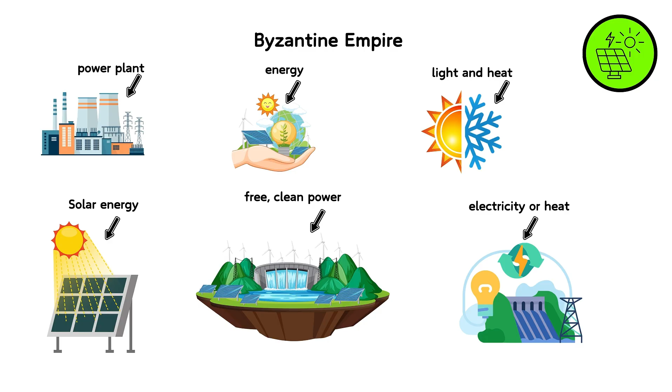The beauty of solar energy lies in its simplicity and abundance. As long as the sun shines, we have access to this incredible power source.

Solar panels, which you might see on rooftops or in large fields, are like sunlight catchers. They're made of special materials that get excited when sunlight hits them, creating an electric current. This process, called the photovoltaic effect, is like magic. It turns light directly into electricity without any moving parts or noise.

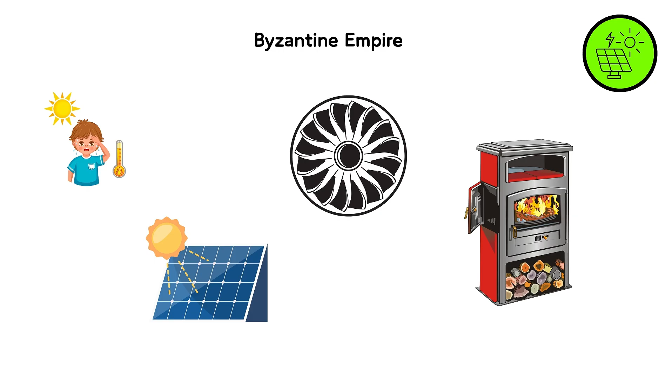But solar energy isn't just about electricity. We can also use the sun's heat directly. Solar thermal systems can warm up water for homes or even power large steam turbines in solar power plants. In some countries, people use simple solar cookers to prepare meals, harnessing the sun's heat directly.

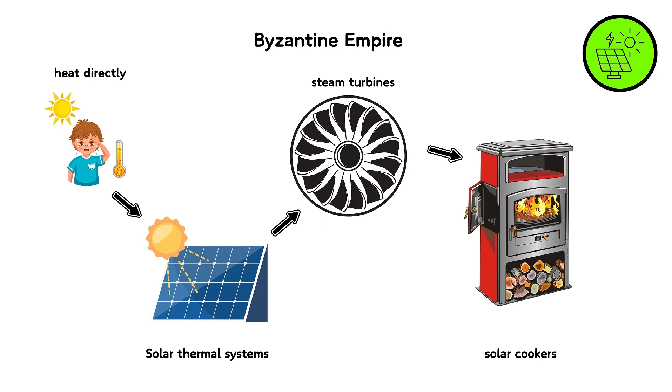The potential of solar energy is mind-boggling. In just 1 hour, the sun provides enough energy to power the entire world for a year. As we get better at capturing and storing this energy, solar power could revolutionize how we power our lives, leading to cleaner air, reduced climate change, and energy independence for many regions.

Wind energy. Wind energy is like harnessing the breath of the planet. It's a dance between the sun's warmth and the Earth's rotation, creating invisible rivers of air that flow across our world. Humans have been tapping into this power for thousands of years, from sailing ships to windmills grinding grain.

Today, we've scaled up this ancient technology to produce significant amounts of electricity. Modern wind turbines are like gigantic pinwheels, some as tall as skyscrapers. As the wind blows, it pushes against the blades, causing them to spin. This spinning motion is converted into electricity through a generator inside the turbine. It's a beautiful example of turning motion into power, much like a bicycle dynamo but on a massive scale.

One of the most exciting aspects of wind energy is its potential for offshore development. Out at sea, winds are stronger and more consistent. Massive wind farms can be built without taking up valuable land, turning our vast oceans into clean power plants.

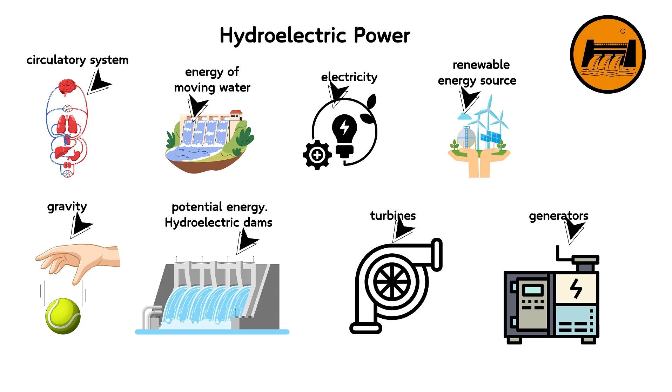The principle behind hydropower is beautifully simple. As water flows downhill, pulled by gravity, it carries enormous potential energy. Hydroelectric dams capture this energy by forcing water through turbines, spinning them like giant underwater windmills. These turbines are connected to generators that convert the mechanical energy into electricity.

What makes hydropower special is its reliability and flexibility. Unlike wind or solar, hydroelectric plants can produce power consistently, day and night, as long as there's water in the reservoir. They can also quickly adjust their output to meet changing energy demands, acting like a natural battery for the electric grid. But hydropower isn't just about massive dams.

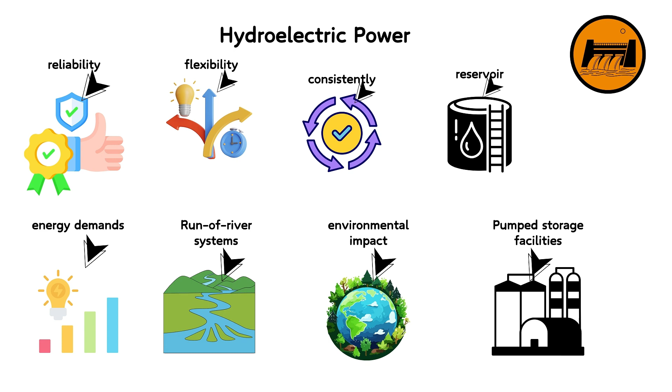Run-of-river systems harness the natural flow of rivers without large reservoirs, minimizing environmental impact. Pumped storage facilities act like giant batteries, pumping water uphill when electricity is cheap and releasing it to generate power when demand is high. While hydropower has significant benefits, it also comes with challenges.

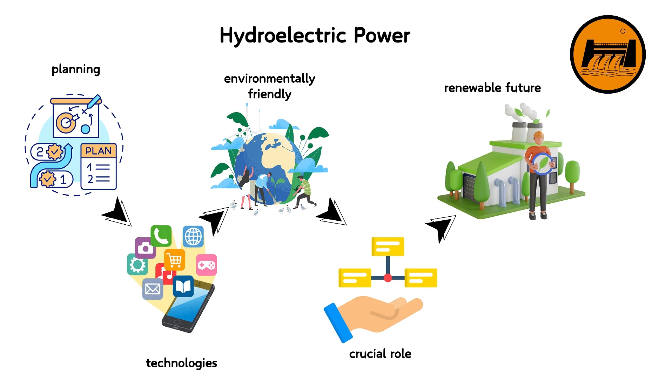Large dams can disrupt ecosystems and displace communities. However, with careful planning and new technologies, we're finding ways to make hydropower more environmentally friendly, ensuring this powerful energy source continues to play a crucial role in our renewable future.

Biomass energy. Biomass energy is like recycling the sun's energy stored in living things. It's a versatile renewable source that turns organic matter, from trees and crops to animal waste, into usable heat and electricity. In a way, it's solar energy with a biological twist, captured through photosynthesis and released when we need it.

The concept of biomass energy is as old as the first campfire, but today's applications are far more sophisticated. We can burn wood chips or agricultural residues directly in power plants, much like coal, but with a crucial difference: the carbon released was only recently absorbed from the atmosphere, making it potentially carbon neutral over time.

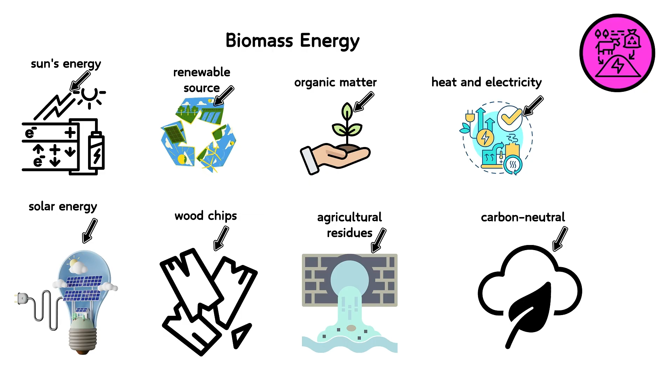But burning isn't the only way to harness biomass. Through various processes, we can transform organic matter into biofuels like ethanol or biodiesel, providing renewable alternatives to fossil fuels for transportation. Another exciting application is biogas production, where microorganisms break down organic waste in oxygen-free environments, producing a methane-rich gas that can be used for cooking, heating, or generating electricity.

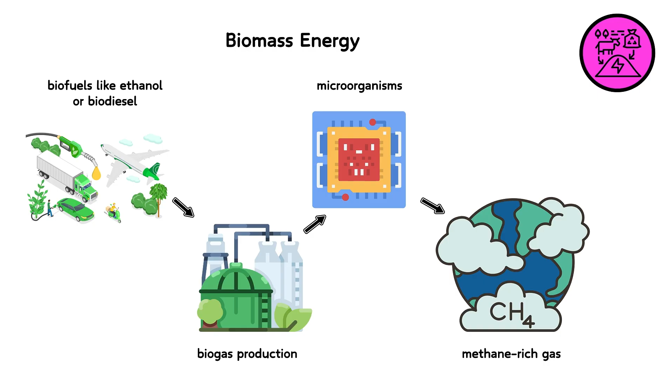One of the most compelling aspects of biomass energy is its potential to solve multiple problems at once. It can provide a use for agricultural waste, help manage landfills, and offer a renewable energy source, all while supporting rural economies. However, biomass isn't without controversy. There are concerns about competition with food crops and the sustainability of large-scale biomass production. The key lies in responsible management and using waste materials rather than dedicated energy crops.

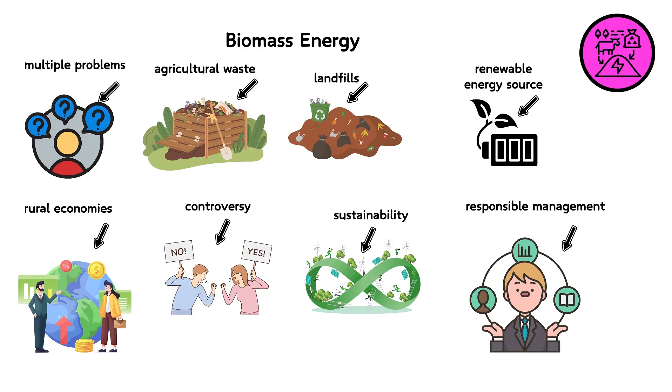Geothermal energy. Geothermal energy is like tapping into the Earth's own furnace. Deep beneath our feet, the planet's core is a swirling mass of molten rock and metal, generating immense heat. This energy source is a testament to the raw power contained within our planet, quietly warming the ground beneath us and occasionally bursting forth in spectacular volcanic displays.

Harnessing geothermal energy involves drilling deep into the earth to access hot water and steam trapped in underground reservoirs. This heat can be used directly for warming buildings or greenhouses, or it can be converted into electricity in geothermal power plants. In these plants, steam drives turbines connected to generators, much like in conventional power stations, but without the need for burning fossil fuels.

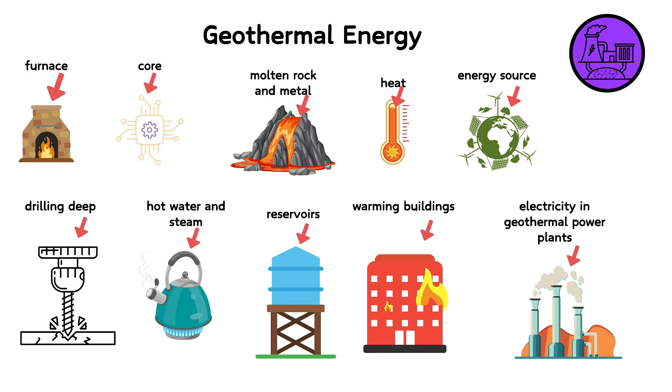What makes geothermal energy particularly attractive is its consistency. Unlike wind or solar, geothermal power is available 24/7, regardless of weather conditions. It's also incredibly space efficient. A geothermal plant can produce as much power as a coal plant in a fraction of the land area.

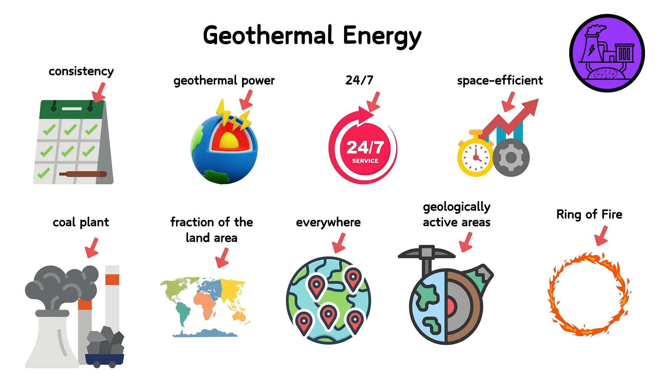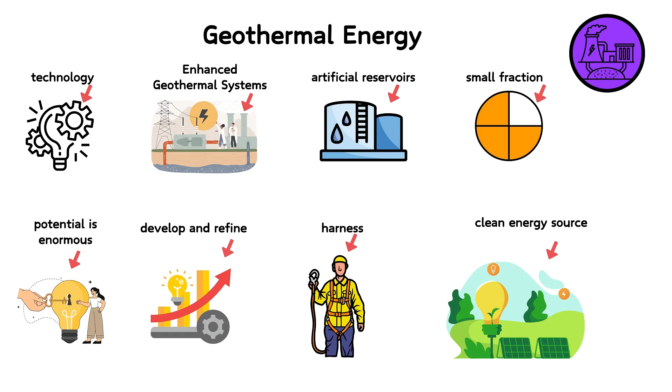However, geothermal energy isn't available everywhere. It's most accessible in geologically active areas, like the Ring of Fire around the Pacific Ocean. But advances in technology, such as enhanced geothermal systems (EGS), are expanding the potential reach of this energy source. EGS involves creating artificial reservoirs by fracturing hot dry rocks and pumping water through them, essentially manufacturing geothermal resources where they don't naturally occur. While geothermal energy currently provides only a small fraction of global electricity, its potential is enormous. As we continue to develop and refine geothermal technologies, we're learning to better harness this vast, clean energy source sleeping beneath our feet.

Ocean energy. Ocean energy is like harnessing the heartbeat of our planet. The vast, restless seas that cover more than 70% of Earth's surface hold an immense amount of energy in their waves, tides, and temperature differences. This renewable source represents one of the last great frontiers in clean energy production.

Tidal energy taps into the regular rise and fall of ocean levels caused by the gravitational pull of the moon and sun. Imagine giant underwater turbines spinning as water rushes in and out of bays and estuaries. These predictable tides offer a reliable source of power, unlike the intermittent nature of wind or solar. Tidal barrages work like dams across estuaries, while tidal stream generators operate more like submerged wind turbines.

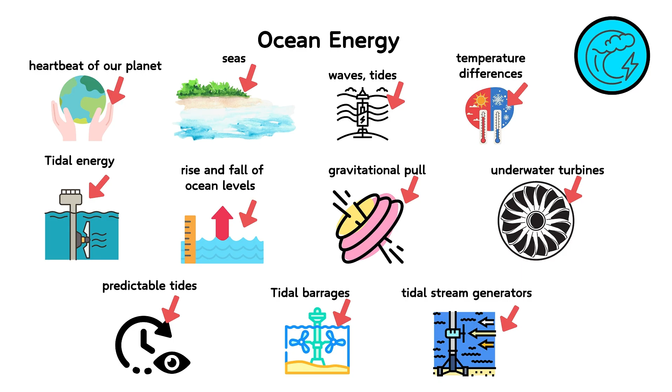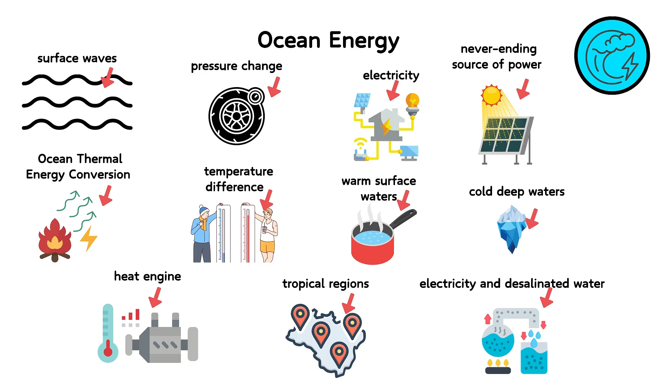Wave energy, on the other hand, captures the power of surface waves. Various ingenious devices bob up and down with the waves or use the pressure changes as waves pass over them to generate electricity. It's like converting the ocean's constant motion into a never-ending source of power. Another fascinating form of ocean energy is ocean thermal energy conversion, OTEC. This technology exploits the temperature difference between warm surface waters and cold deep waters to drive a heat engine. It's particularly promising for tropical regions and could provide both electricity and desalinated water.

While ocean energy technologies are still in their infancy compared to other renewables, they hold enormous potential. The energy contained in the world's oceans could theoretically meet all of humanity's power needs many times over. As we continue to innovate and overcome challenges like corrosion and marine ecosystem impacts, ocean energy could become a major player in our clean energy future.

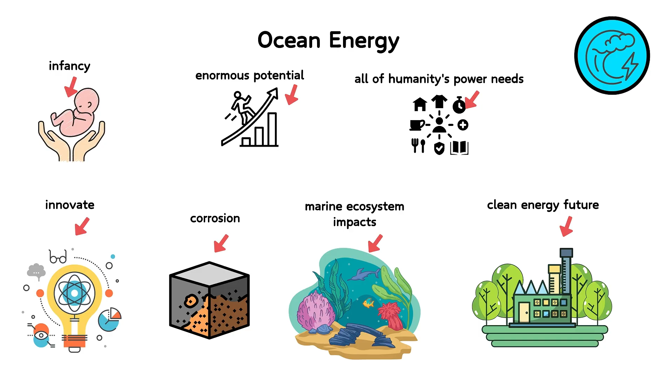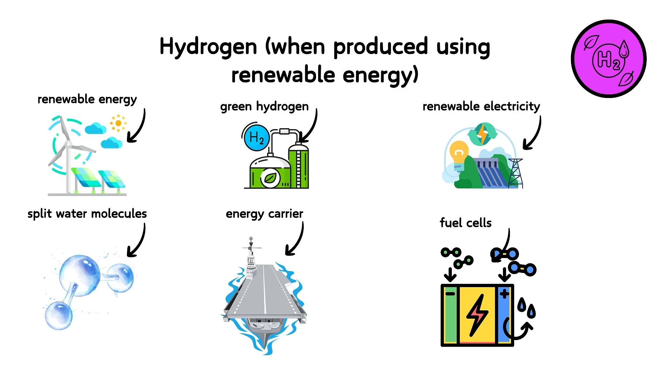Hydrogen, when produced using renewable energy. Hydrogen, the simplest and most abundant element in the universe, represents a fascinating frontier in renewable energy. When we talk about hydrogen as a renewable energy source, we're specifically referring to green hydrogen, hydrogen produced using renewable electricity to split water molecules. Think of hydrogen as a versatile energy carrier rather than an energy source itself. It's like a clean energy Swiss Army knife. It can be burned directly, used in fuel cells to produce electricity, or utilized in various industrial processes.

The magic of hydrogen lies in its clean combustion. When burned or used in a fuel cell, the only byproduct is pure water.

The process of creating green hydrogen starts with renewable electricity, perhaps from solar panels or wind turbines. This power is used in a device called an electrolyzer, which sends an electric current through water to split it into hydrogen and oxygen. It's like electrolysis, the experiment you might have done in school science classes.

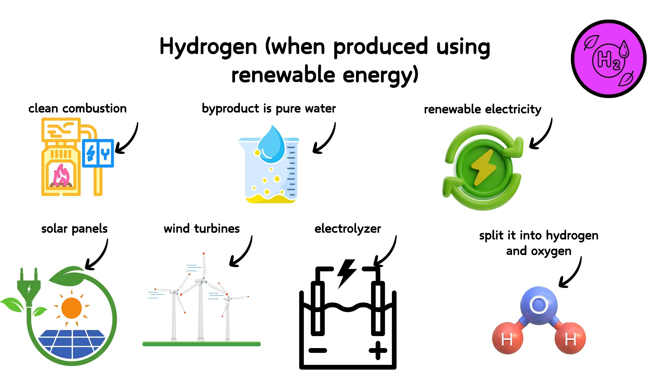One of the most exciting aspects of hydrogen is its potential to solve the intermittency problem of renewables. Excess solar or wind power can be used to produce hydrogen, which can then be stored and used when the sun isn't shining or the wind isn't blowing. This makes hydrogen a form of energy storage, helping to balance the grid and make renewable energy more reliable.

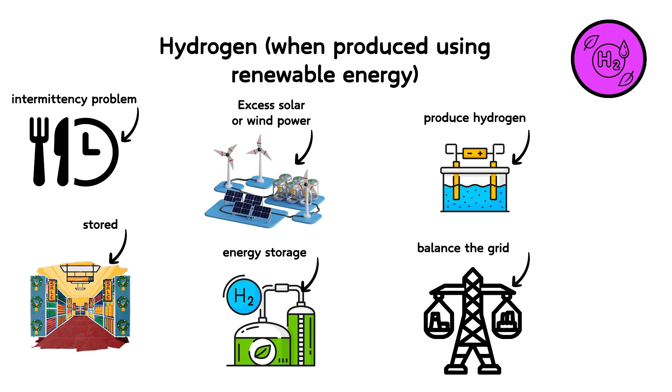Hydrogen also offers a path to decarbonize sectors that are difficult to electrify directly, such as long-haul transport, steel production, and high-temperature industrial processes. As we continue to scale up production and improve efficiency, green hydrogen could play a crucial role in our transition to a fully renewable energy system.

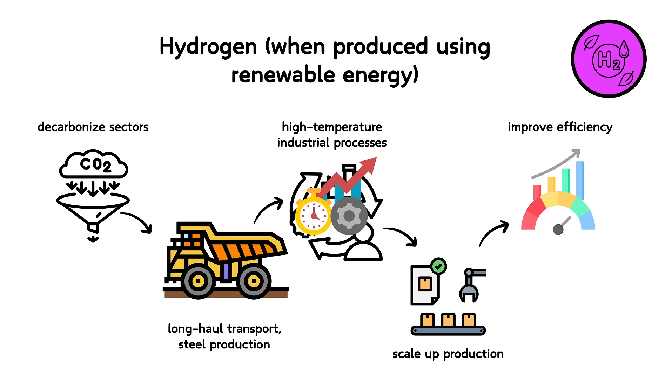Photovoltaic solar panels. Photovoltaic, PV, solar panels are like leaf-like structures for our technological world, harvesting sunlight and converting it directly into electricity.

These marvels of engineering embody one of the most elegant solutions to our energy needs, silently producing power with no moving parts, no emissions, and minimal maintenance.

At the heart of each solar panel is a collection of solar cells, typically made from silicon. When sunlight strikes these cells, it knocks electrons loose from their atoms. This phenomenon, known as the photovoltaic effect, was first observed by Alexandre Edmond Becquerel in 1839, but it took over a century for the technology to become practical.

Modern solar cells are sandwiches of specially treated silicon layers. The top layer is designed to easily give up electrons when struck by photons of light, while the bottom layer eagerly accepts these freed electrons. This creates a flow of electricity that can be harnessed and used to power our homes, businesses, and even entire communities.

What makes PV technology truly revolutionary is its scalability. From tiny cells powering calculators to vast solar farms spanning acres, the basic principle remains the same. This flexibility allows for diverse applications, from off-grid solutions for remote areas to integrated building materials that turn entire structures into power generators.

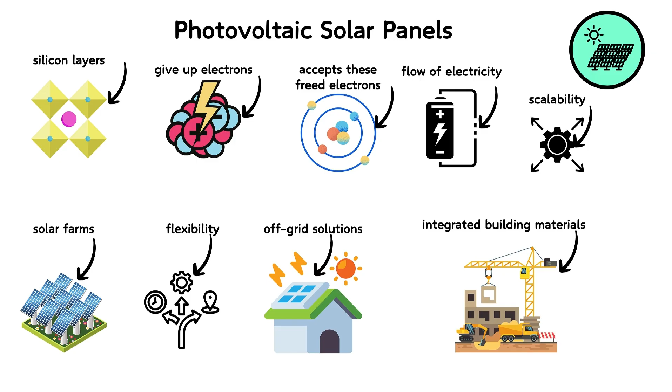As efficiency improves and costs continue to fall, PV solar panels are becoming increasingly competitive with traditional energy sources. They're not just an alternative anymore, but a mainstream solution that's reshaping our energy landscape. With ongoing research into new materials and designs, the future of photovoltaic technology looks brighter than ever.

Concentrated solar power, CSP, is like creating a solar magnifying glass on an industrial scale. This technology harnesses the sun's energy not through photovoltaic cells, but by using mirrors to focus sunlight onto a small area, generating intense heat that can be used to produce electricity.

Imagine a field of mirrors, all perfectly aligned to reflect sunlight onto a single point atop a tall tower. This point, often a receiver filled with a heat transfer fluid like molten salt, can reach temperatures of over 1000 degrees Fahrenheit, 538 degrees Celsius. This scorching heat is then used to boil water, creating steam that drives turbines to generate electricity, much like in a conventional power plant.

What sets CSP apart is its ability to store energy. The heated fluid can retain its temperature for hours, allowing the plant to continue producing electricity even after the sun has set. This overcomes one of the biggest challenges of solar energy, its intermittency, making CSP a reliable source of renewable power day and night.

There are several types of CSP systems. Besides the tower design, there are parabolic troughs that focus sunlight along a pipe running their length, and dish systems that look like giant satellite dishes. Each has its advantages, but all share the core principle of concentrating sunlight to generate heat.

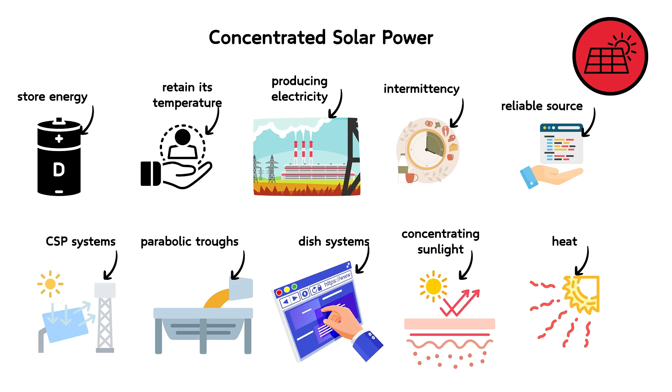CSP plants are typically built in areas with high direct solar radiation, like deserts. While they require significant upfront investment, they can produce large amounts of power with zero fuel costs and minimal environmental impact once operational. As we continue to refine this technology, CSP could play a crucial role in our transition to a clean energy future, providing steady, reliable solar power on a massive scale.